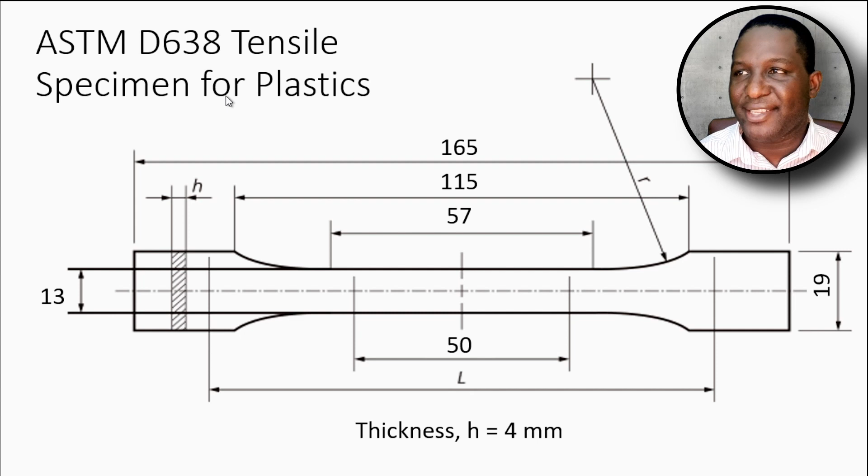So this is a design of the specimen, the ASTM D638 tensile specimen for testing plastics. So basically it looks like this. It's got this dog bone shape and the dimensions are given here. So let's just jump into ABAQUS. Okay, so here we're in ABAQUS.

So basically the first thing we need to do is to create the tensile specimen. So I'm going to call this an ASTM D638 Type 1 specimen. This particular dimension we're looking for is a Type 1 specimen. Of course, there are other designs of that, but we're working with a Type 1. So we're going to work with the extrusion method.

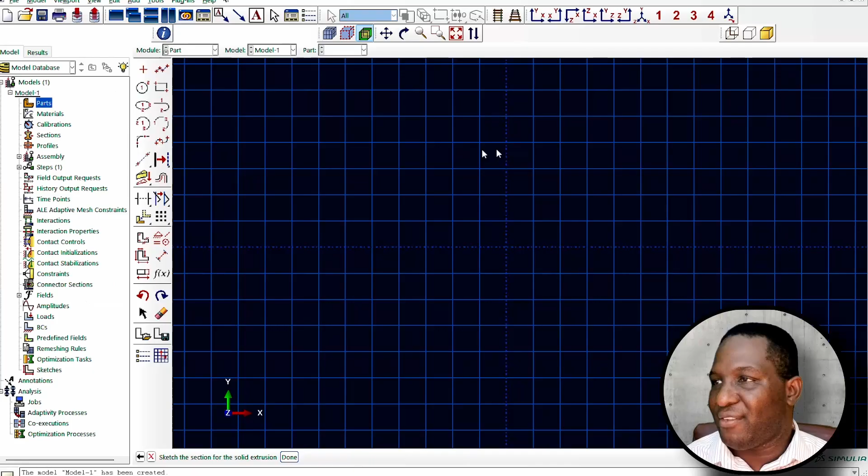And so if you look at this, what we are expecting is the total length of 165. So half of 165 is 82.5. So I'm going to orient everything in the middle. So minus 82.5, and the total height is 19. So that will be 9.5. So basically we'll start there.

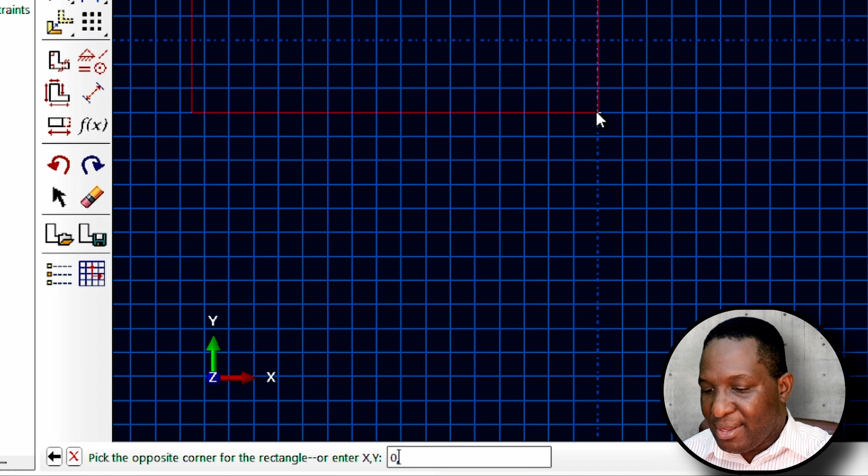So let's say we stop in the middle. So right under here would be 0 on the x-axis and minus 9.5 on the y-axis. So that gives me half of the specimen that I'm trying to design. So we'll work with that for now.

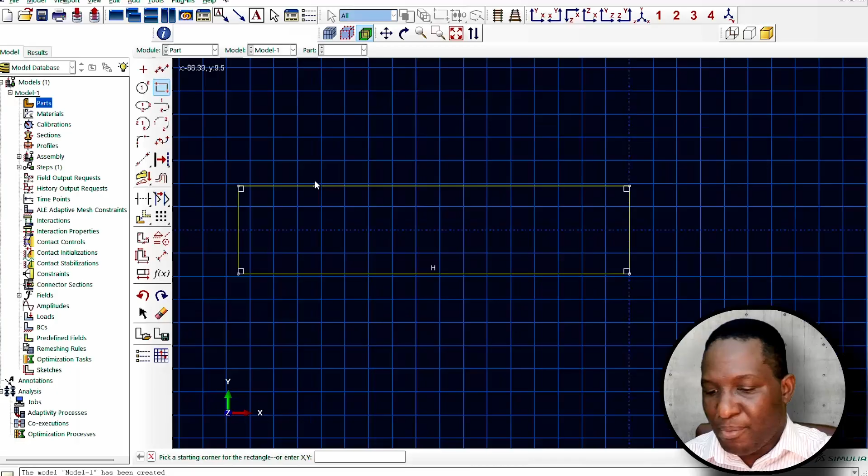Okay, and then the next thing is we need to work with the region around here. So already we know that this is 115. So half of 115 would be 57.5, minus 57.5 and 9.5 as well. So we go all the way to the middle here and we finish. So that's the second gauge section that we are interested in.

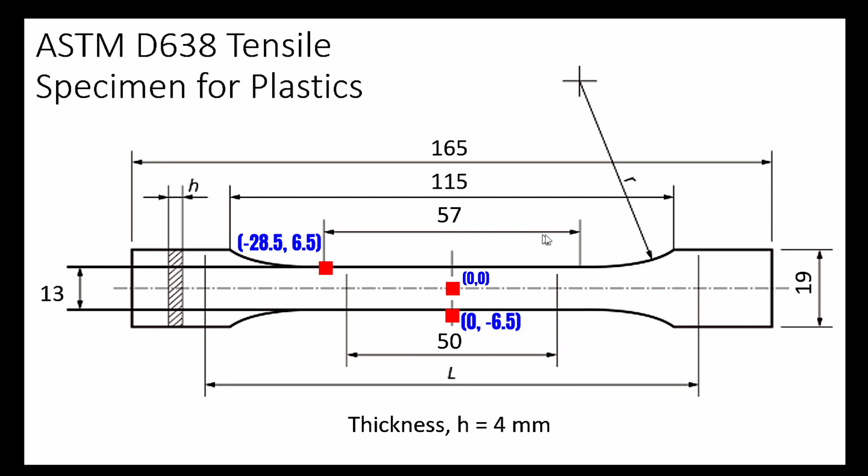Now we obviously need to work with this region, which is 57. So we can specify that region as 57, which will be 28.5. So that will be minus 28.5, and the height is 13. So half of 13 will be 6.5. And then we'll go to the end where we have 0 and minus 6.5. All right, so we've got all those noted.

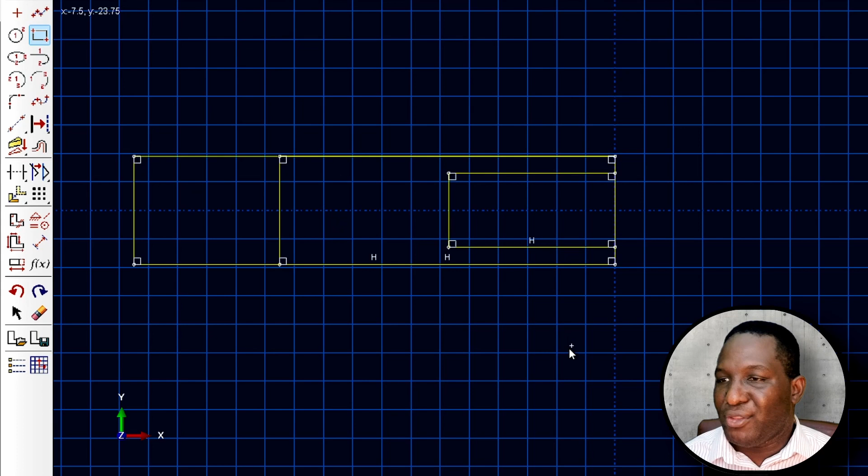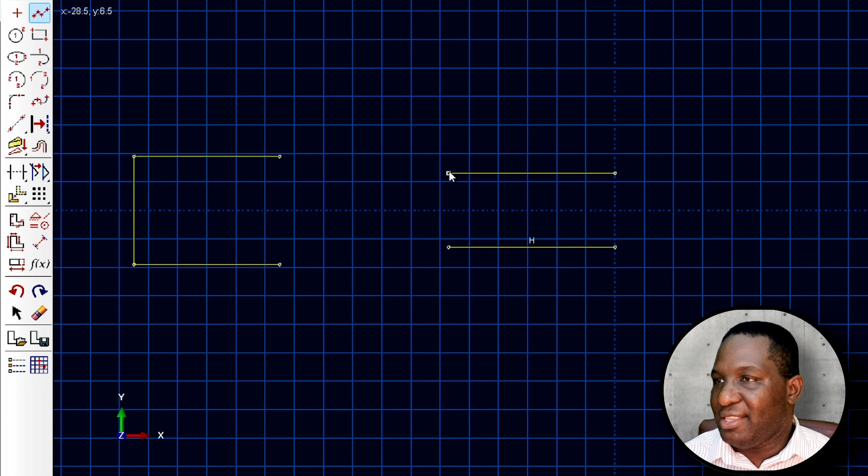All that we need to do is just to remove some of these distances. So we'll remove all of that. And then, okay, so we have the grip ends. We've got also this region. So what I just want to do is to extend this a little bit more to somewhere around minus 40. And then the same thing here, from there to minus 40. So typically something like that.

Then the last thing to do is to create the arc, the tangent. So we start from here and then we'll go up there. We start from here and then we'll go up there. So that's basically half of the sample.

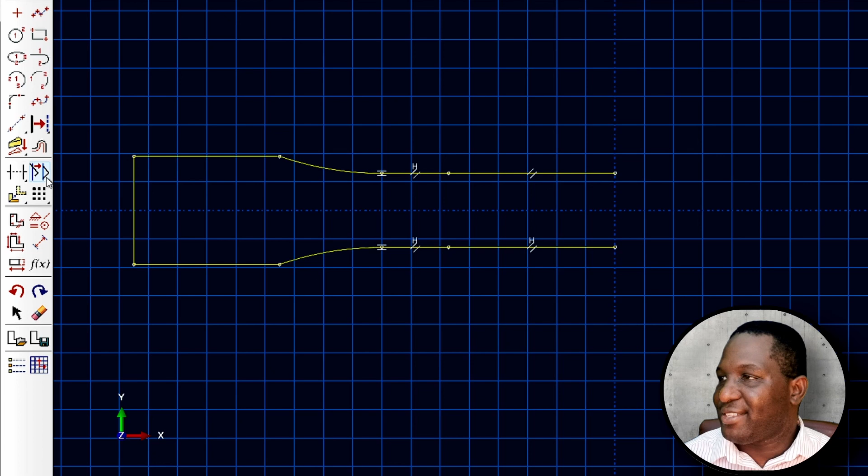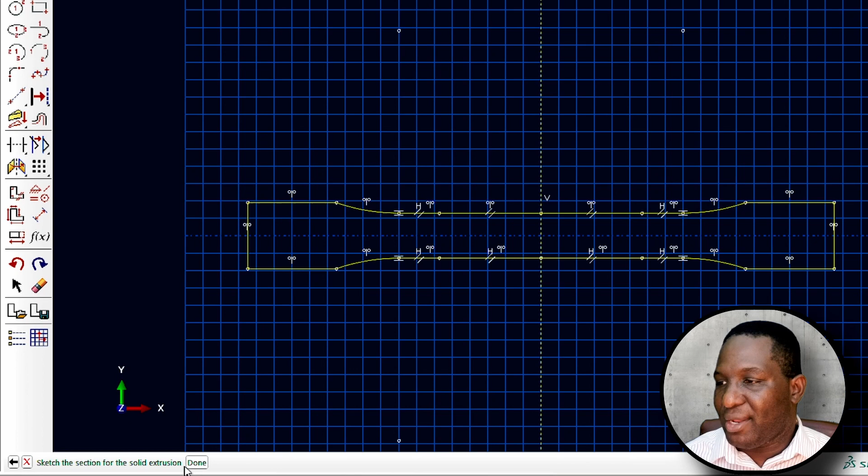Then all we need to do is introduce a construction line right here. And then with that construction line, we can select what we want to do. We want to create a copy. This is our mirror line, and then this is what we want to replicate. And so that way we now have our full sample as it's supposed to be, and then we click done. So in this case we want it to be 4 millimeters thick. So that's the sample, the ASTM standard.

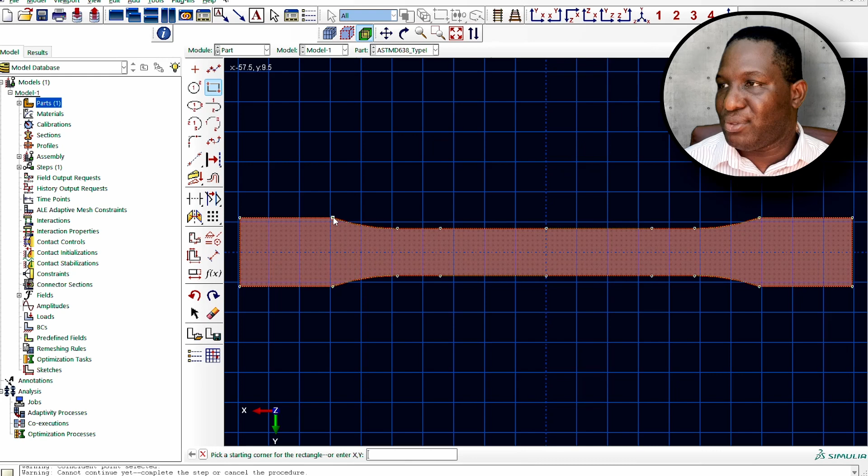So the next thing is to partition, to separate where the grips will be and where the gauge section will be. And so how do we go about that? So we use this option and select there, and okay, done, and then create what a vertical edge will be on the sample. Then use the rectangle to partition here. So this will partition out here and partition there. Then we'll also need to partition the gauge section, which we know is 50 mm in the middle.

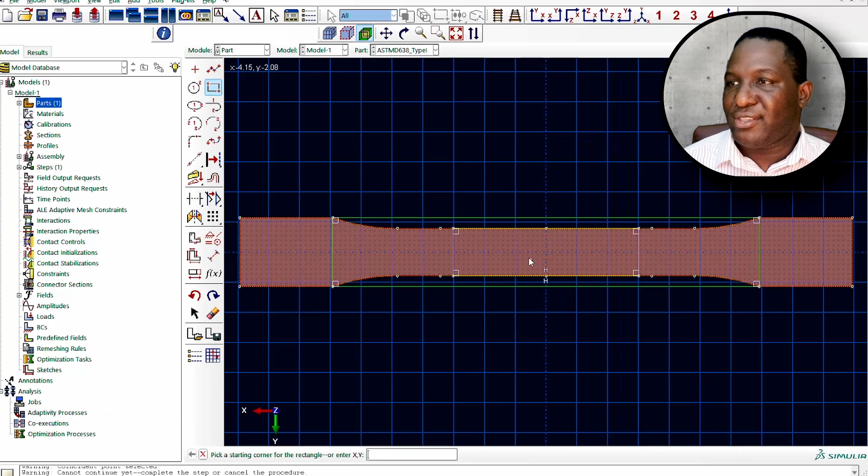So all we're going to do is, okay, minus 25 for half of 50 and 6.5 at the top end here. And then right at the other end will be 25 and then minus 6.5. All right, so we've got that, and then click done. So we can see the partition.

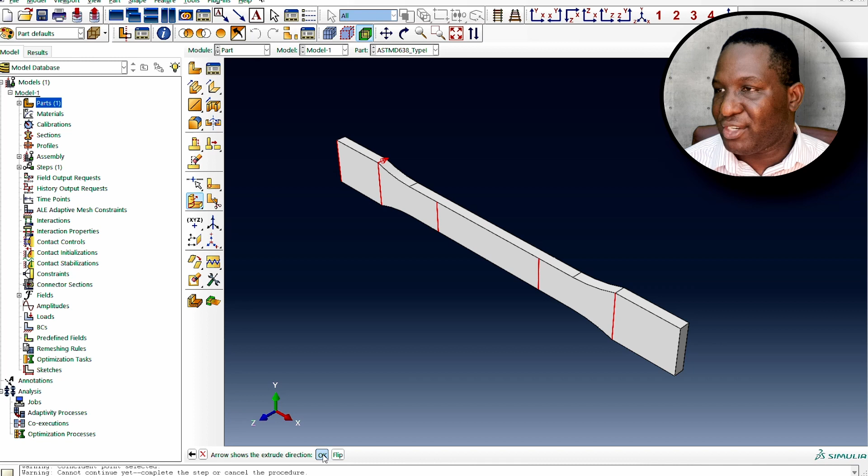All we now need to do is to press and hold. We select this end, which will allow us to select the individual edges for extruding. So we want this for our extrusion cut, this for extrusion cut, and then this for extrusion cut. Okay, and then we basically specify what direction we want. We want it to be along that direction, and click OK. Okay, so you can see the partitions are created as well as the center region.

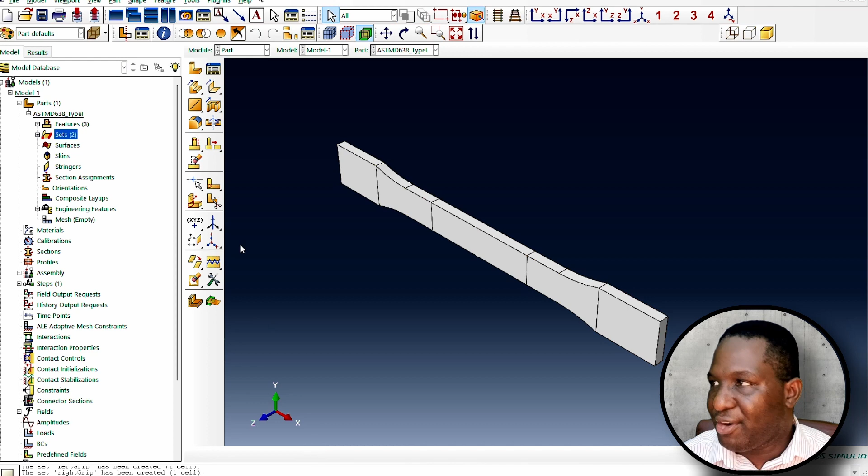Then what we'll do is we go to the parts module and create the set. So this will be my left grip. The left grip will be this end, and then we've got the right grip. So that will be the right grip, and then of course we need the gauge section. So the gauge section will be the middle region.

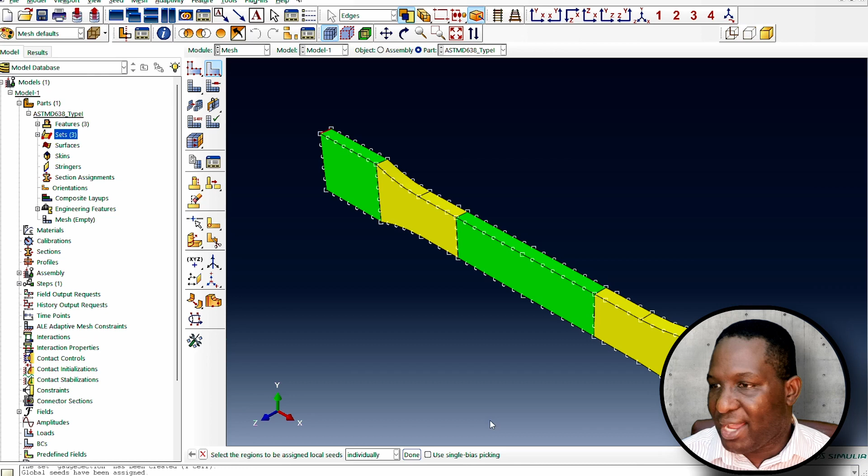Now, once that is done, then we can look at meshing. So if we click on that, let's just use 3.5, something a little bit big, because I'm using a student license. It doesn't allow you to go beyond 1000 nodes. So I want to seed that edge, to allow myself the opportunity to be able to apply up to, let's say, just two on that face, two in between.

And then we can, okay, what we want. So we basically want to use a sweeping method, medial axis algorithm, mesh transition, minimize, and then we can mesh the model. So the model looks okay and everything is fine.

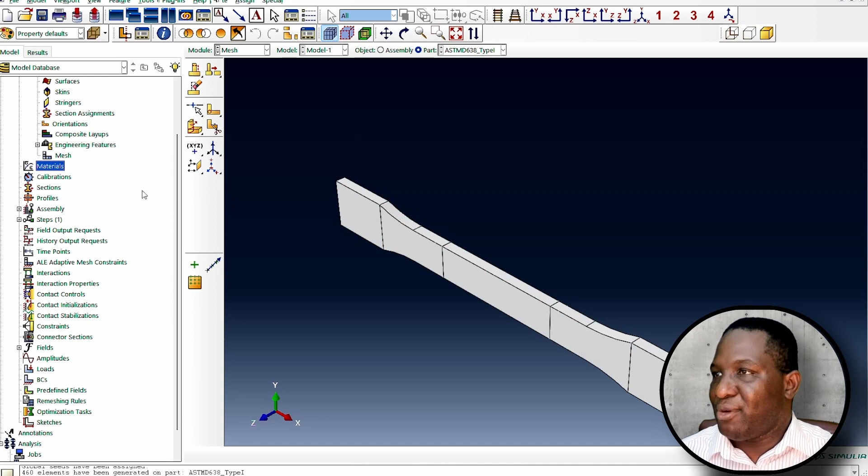So we then create a material. Because it's a plastic, I'm going to use a PP polypropylene with elastic properties of 1.3088e3, because we're working in dimensions of millimeters. And then the plasticity would be 40, and then a plastic strain of 0. So a simple model like that.

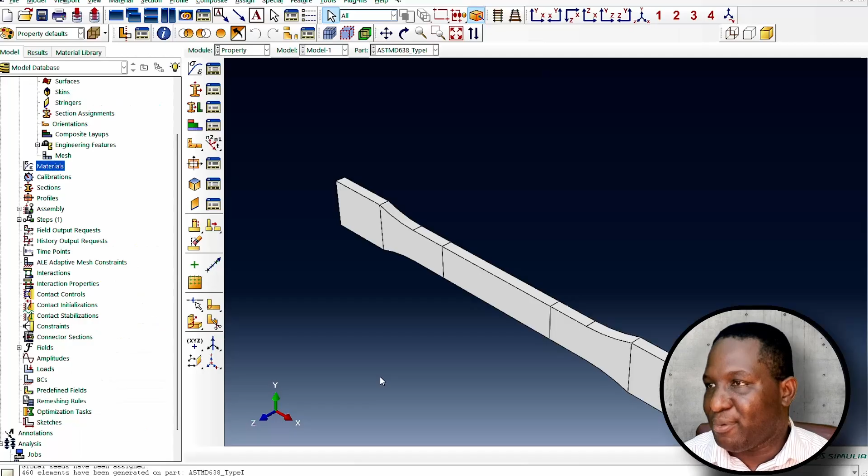So we create a section, which is my PP section, and then we can do a section assignment to basically assign all of that element to the PP section. So we can go and create an instance. Okay, so that's fine. And then we can create a loading step. So a static general loading step is probably okay. So we can then think about the boundary conditions.

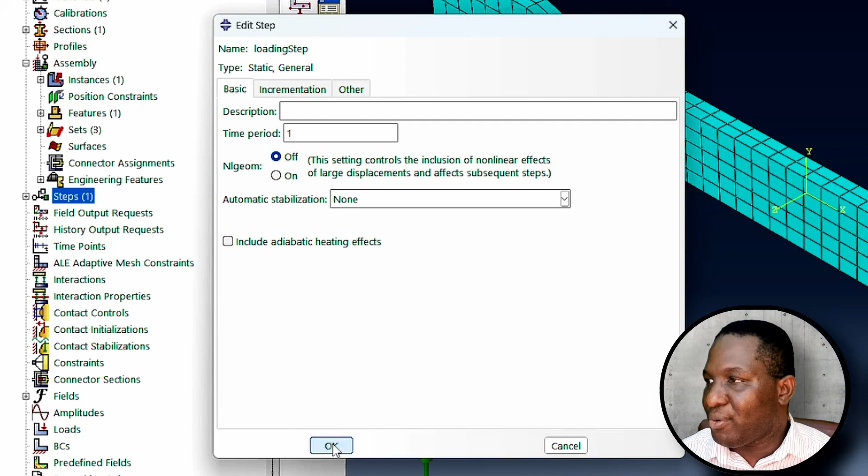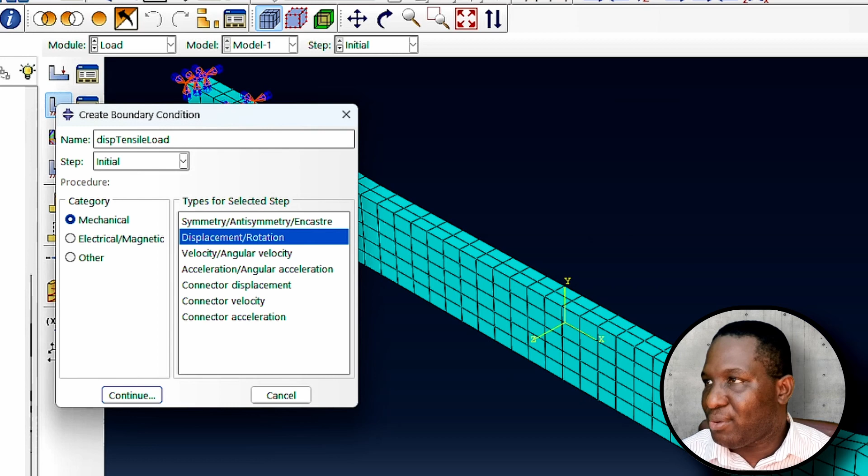So I'm going to fix the back, and it will be with an initial step with displacement controlled. So that would then give us everything here all fixed. And then with the front end, we apply our load. So a displacement tensile load. It will be associated with a loading step, and then we'll select that front end, and everything will all be 0 except this one, which we are going to make, let's say 20. So that means we are deforming it in that direction.

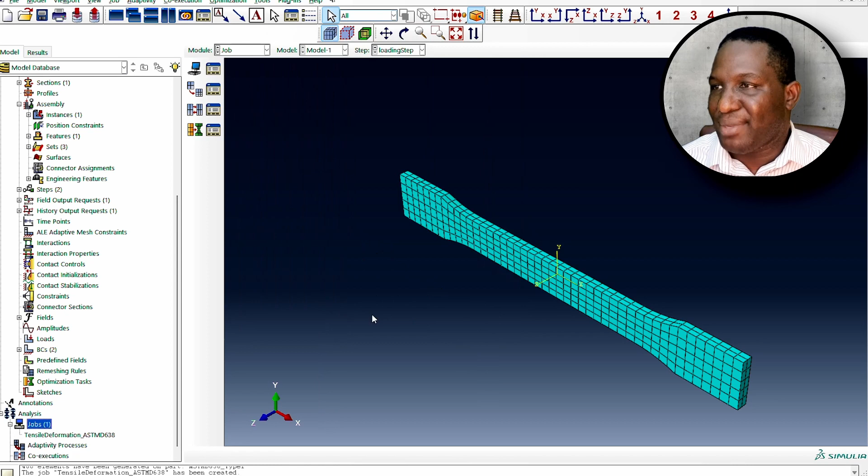And then we can create the job. So, tensile deformation for ASTM D638 specimen, and then we can run and submit the job. So the results look as expected. You get a nice normal deformation for this tensile specimen with a clear region in the gauge section here where there is a uniformity of stress distribution. And that's how you can model this sample.